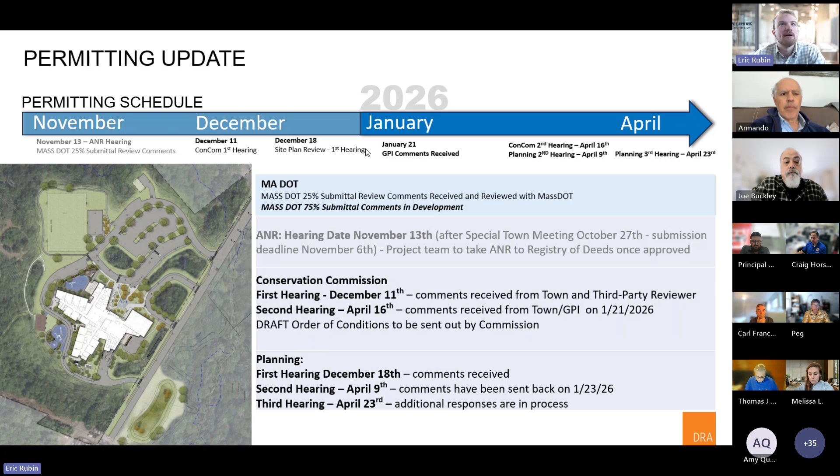Our overall project schedule: right now we are nearing the end of design development. Our 60% construction document package was completed and submitted to the MSBA at the beginning of February. Our 90% package will be complete in April, and our complete bid document package will be finished in June, and that'll go out to the qualified subcontractors.

We are actually in the process of pre-qualifying the subcontractors right now. Our request for qualifications went out earlier this week, and we expect to receive qualification packages from the interested subs in a few weeks, around April 15th.

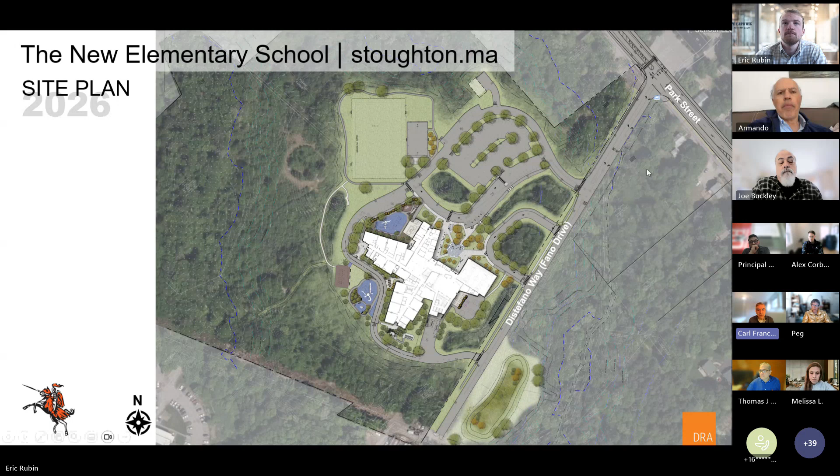We can go to the next one, Eric, that shows the site in a little more detail. So we have the opportunity here on this parcel of land that the town has owned for quite a while to develop an appropriate site plan that's both environmentally friendly and energy efficient, and much more efficiently laid out than the current South School, where there's very limited vehicular access both for buses and cars.

Here we have the opportunity to have a dedicated parent car loop for picking up and dropping off students, a separated bus loop for the 4 or 5 buses that'll serve this new school, and even a dedicated service drive and kindergarten drop-off around behind the school. So all of that is very consistent with the design we've shown to date.

And the building, as you can see in this site plan, is laid out in the pinwheel fashion with dedicated wings to the building. Two of the wings are classroom wings, one of the wings is the so-called community wing, and the fourth is the administrative wing there.

Again, the theme here is this is a school in the woods, and so we are trying to preserve a significant number of existing trees on the site as well, to give the building a nice context and a great backdrop for the students and faculty as they utilize the woods as part of the curriculum.

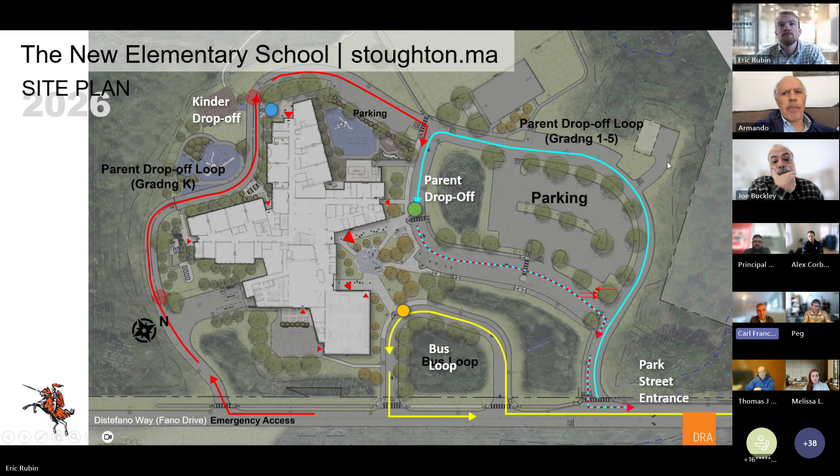Next, Eric, if we zoom in a little more on the building itself. Here's the main entrance, and again, whether you arrive by car, on foot, by bicycle, or get dropped off from a bus, everyone will be entering this entrance courtyard here, where the main entrance to the school is immediately adjacent to the administration for good security and welcoming as well.

And there's a dedicated community entrance too, to the left there, that if there's an event after hours in the cafeteria or the gymnasium, or on weekends, the rest of the school can be closed off and that entrance can be used. So that was another goal of the project that we've been developing here as we move forward.

And you can see the building is a 3-story building in part, but on the front side here it's just 1 story tall, to try to be a little more friendly to elementary students in scale and so forth. But by being 3 stories in the classroom wings, it's a more compact footprint, so we impact less of the site that way and save more trees.

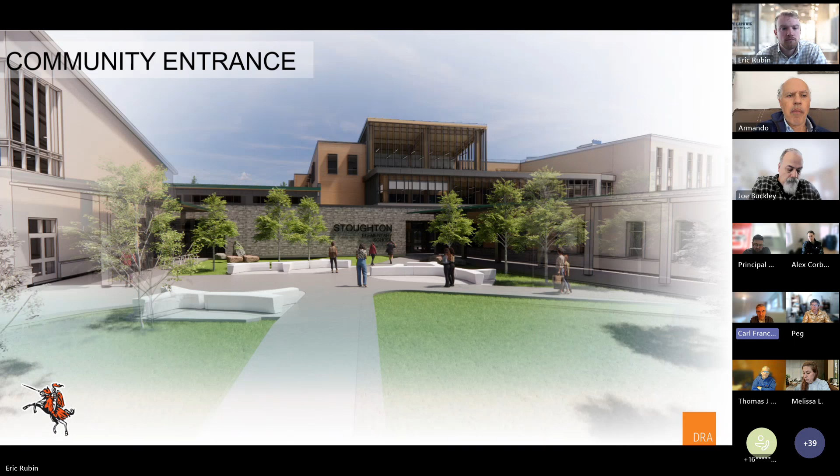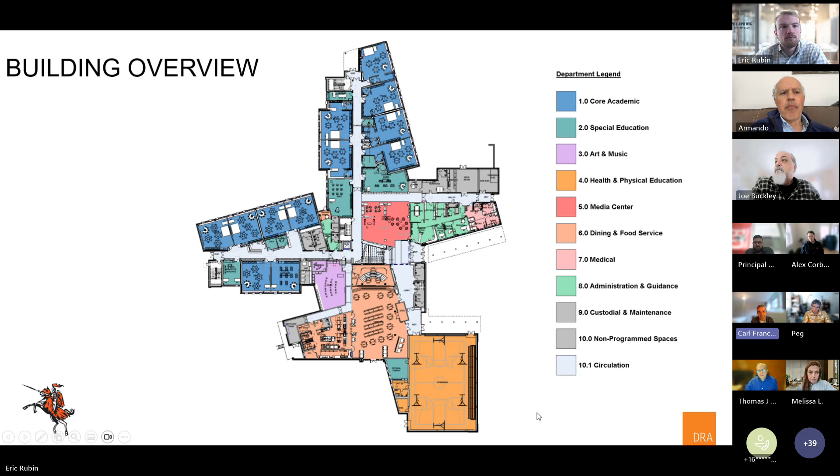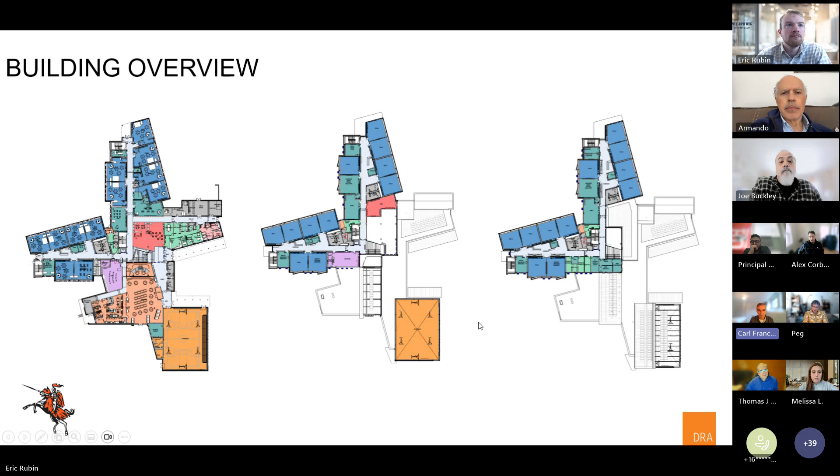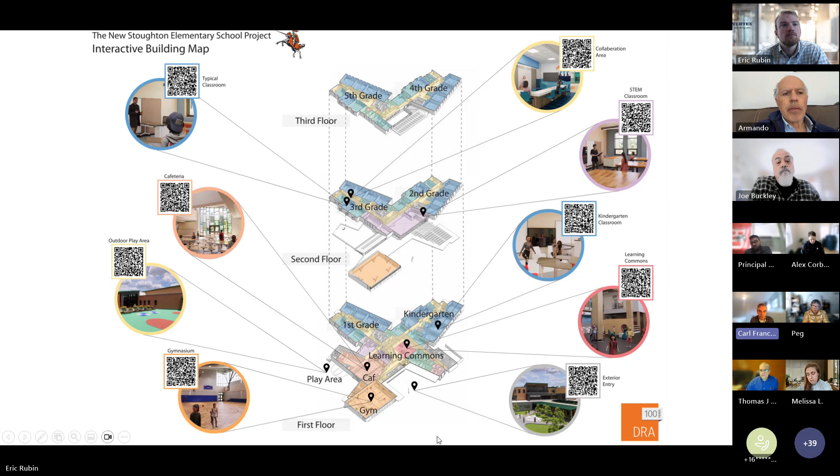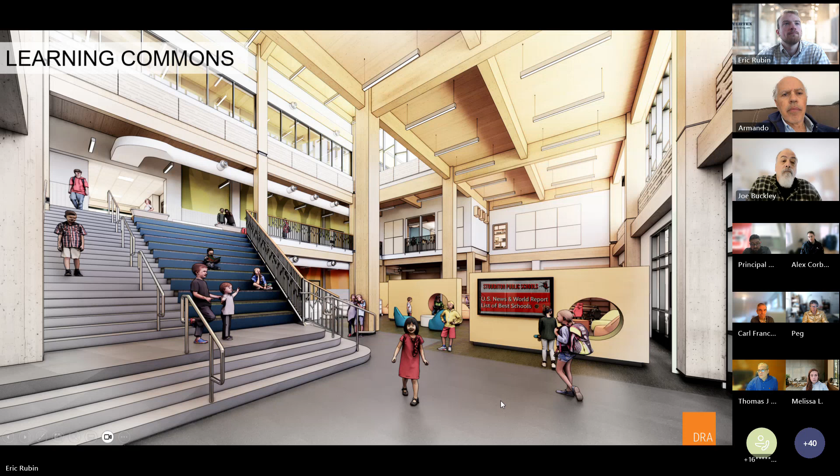If we look at one of these classroom neighborhoods, this is that angled space. In this case, at the lower grades, there are cubbies for kids to store their backpacks and coats. But there's also breakout areas, areas for graphics to identify each of these neighborhoods a little bit different from one another. All of the classrooms open off of these kinds of spaces.

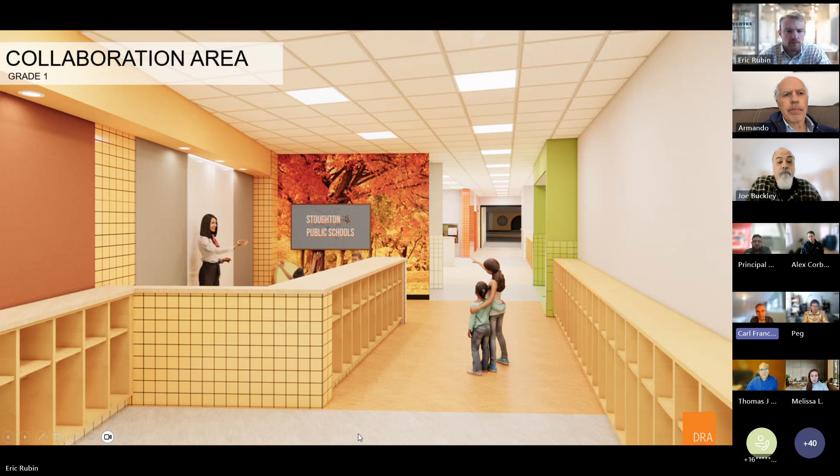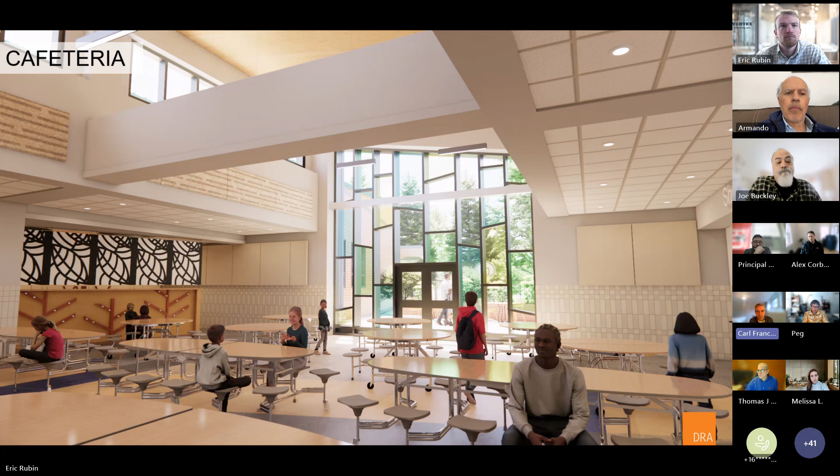In the cafeteria, which is also the auditorium space, you can see there's large glass areas, bringing a lot of natural light into the building, and it has direct access to recess and playground areas right outside the cafeteria. The tables are flexible and can be stored, and the space can be converted into the auditorium space for the school. If we go to the other view of this, you'll see, looking the other direction, there's a small platform.

Stage and curtains and a projection screen, so it can be used for community events as well as student productions and so forth in this one space, again with a lot of natural light being brought in.

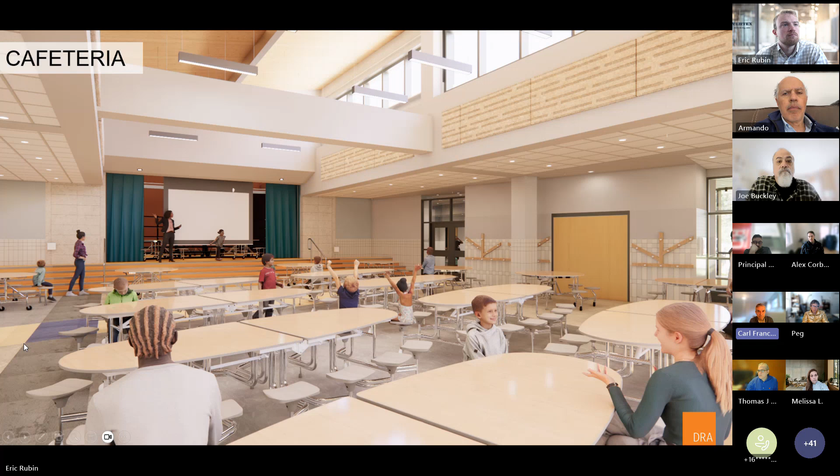Likewise, next is the gymnasium, which is not just an elementary school gym—it's actually sized with an adult-sized basketball court. It does have a curtain to divide it into multiple gym stations, but it's also flexible, that it could be used for a community, could be used for the high school JV basketball team to come here and play, and so forth.

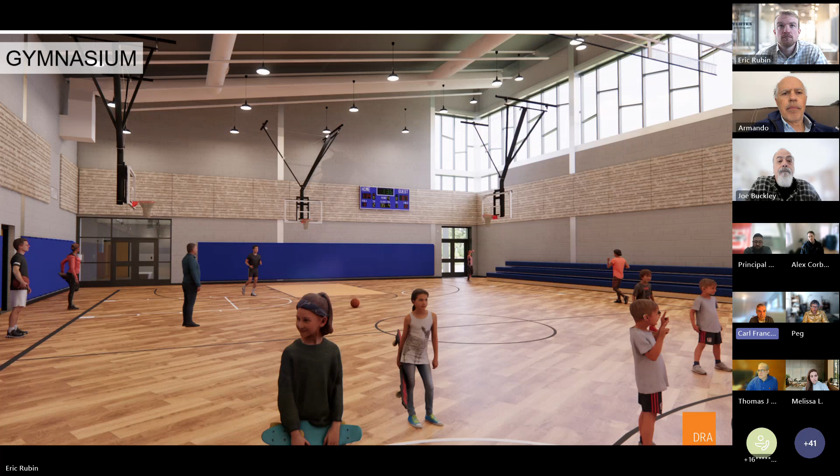And again, take advantage of the north-facing light here, so we get natural light into this space as well. So I think those are the renderings that we wanted to share with you.

Just to remind everyone, this is going to be a very energy efficient and environmentally friendly building with a lot of sustainability aspects to it. It will be registered with the U.S. Green Building Council, seeking at least a LEED silver registration. It might actually achieve gold certification. One particular aspect is that it's an all-electric building. There are no fossil fuels being burned here, but it also has geothermal ground source heat pumps being used for a portion of the building, both for heating and air conditioning, where wells are driven into the ground, and we take advantage of the natural difference in temperature there with heat exchangers in the building. So it's a very efficient, sustainable building, both in first cost and in energy cost going forward.

So I think those are what we wanted to talk about from a design point of view, and now we can turn it over to WT Rich team and Alex to talk about construction activities.

Thanks, Carl. Hopefully you guys can hear me okay. My name's Alex Corbett with WT Rich. I'm a senior project manager. I've been with them for 7 or 8 years now at this point. Echoing Carl's sentiments, really excited to get this project underway.

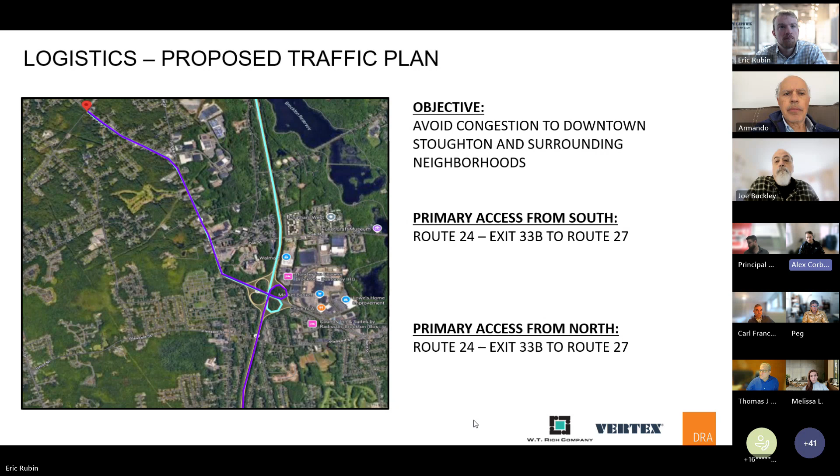Hopefully many of you have seen these logistics plans. I wanted to note they're from our proposal for this project in August of last year. Carl's renderings and images are a lot more updated than what we have shown here, but the concepts and the scheduling and the timing all remain the same. As Eric mentioned earlier, we're just in the midst of getting started on a site enabling package. The work is mostly tree protection, erosion controls, and clearing the site, really enabling the site to continue with building construction as we come out of this phase and more into the middle of summer of this year.

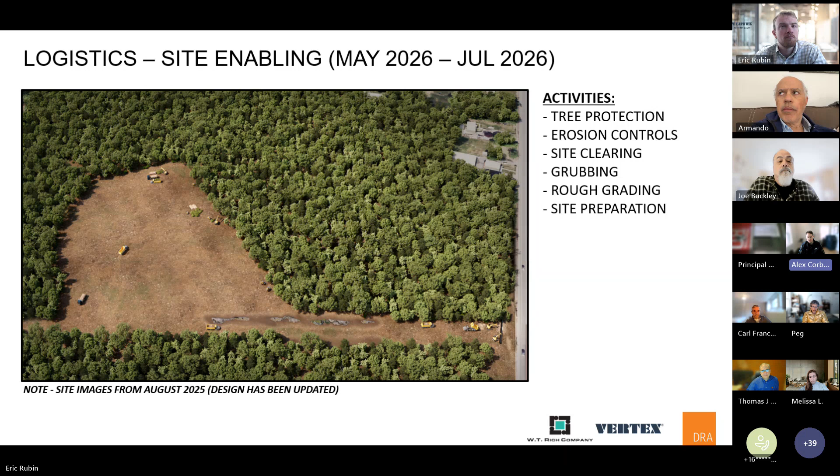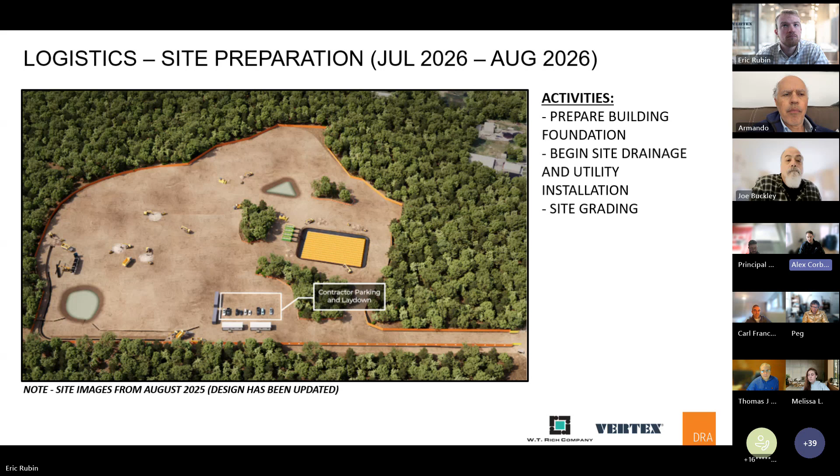As we get into July and the summer months of 2026, we've enabled the site, quote unquote. We're now getting ready to start our site utilities, site drainage, really getting the building pad, essentially the footprint of the new school, prepared for foundations, concrete and steel as we get into fall of 2026. This is the next layer in phasing that happens coming out of, call it May-ish of 2026 with the enabling into the summer months of site preparation as we get into the building construction process.

As you can see here, we're into August of this year. It's really going to come up quick, and I should note, we're talking 24 months in about 2 minutes here. So it's the fastest construction project you'll ever see today. But it is going to go fast. We're talking 4 or 5 months from now, we're getting into concrete foundations and ultimately steel in the building superstructure. Carl mentioned the geothermal wells - you can see at the top of the site here, north area of the site. That's where the geothermal wells will be under the future play field. That's another activity we're going to want to try to get in sooner rather than later, as it opens up quite a bit of space for us on site.

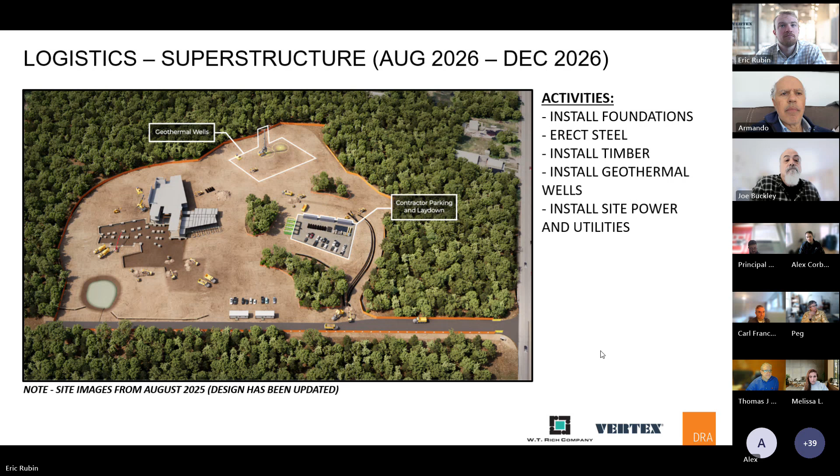Moving in towards the end of this year, we've got the majority of superstructure done with the steel and the mass timber. Those wood beams and columns in the heart of the school are installed, and we're getting into enclosing the building with sheathing, preparing for waterproofing, then the masonry, brick, fiber cement panels, and metal wall panels. At this point we'd also try to get some asphalt pavement down, probably a binder course, to clean up the site and make it usable heading into the colder, messier winter months.

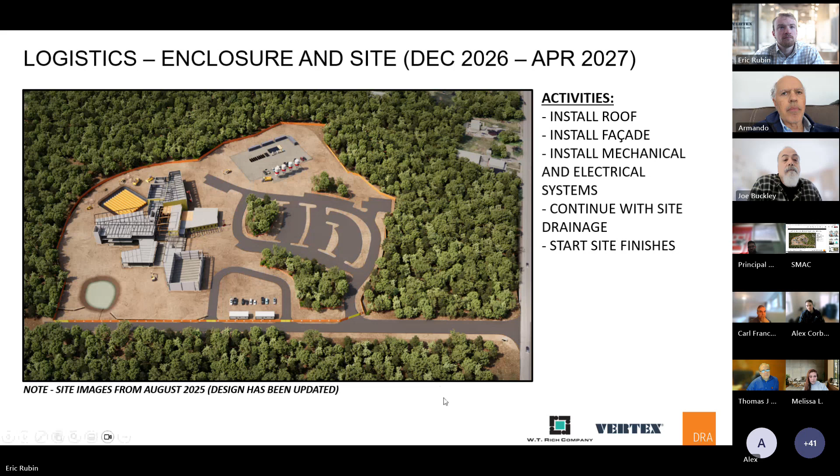Fast forward to the spring of 2027, you can see how the site and building have really developed. We're probably continuing with the brick and wall panel installation, and getting heavy into interior finishes. The mechanical, electrical, plumbing, and fire protection systems are being built within the school. We're preparing to activate the permanent building systems — rooftop units, heat pumps, switch gear — and fine-tuning a lot of the mechanical systems, pretty much all of next year.

Really hitting the ground running once the building is enclosed, getting the inside in good shape. Moving outside, we'll be able to start some of the concrete sidewalks and early landscaping, making sure we sync up with the required planting seasons, and getting into playgrounds and other site finishes throughout the site.

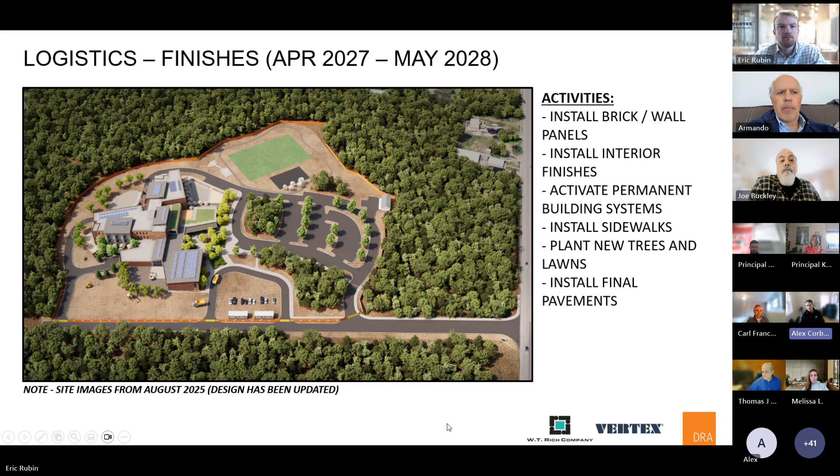And here we are, at the end of the construction process. We're currently targeting May of 2028. The idea is to get the building to a place that can be turned over to the school for furnishings and equipment, and get the school and community feeling comfortable well ahead of the start of the fall 2028 school year. We feel really comfortable with this schedule, and it's at a good spot where the school and community can be prepared to take over their building well ahead of occupying it and getting students in come that following fall.

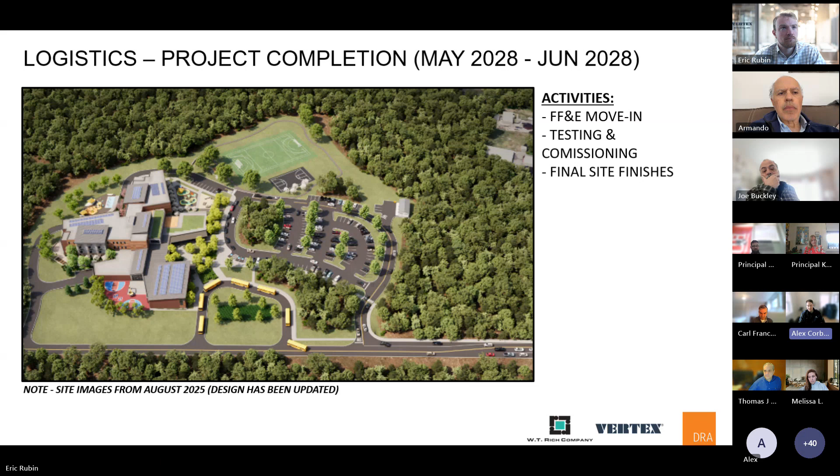All right, thank you, Alex. Thanks, Alex.

Juliet Miller, Superintendent-elect, excited to spend time with you this afternoon. The district is engaging in a redistricting process aligned with the construction of the new elementary school, since that will result in the closure of two elementary schools. This is a necessary step to ensure we're using our facilities efficiently while supporting our students equitably.

We are currently securing a third-party partner to conduct a comprehensive analysis of the district. This work will include enrollment projections, geographic heat mapping, and development of multiple scenarios for consideration. Community voice is critical, and we're committed to providing multiple opportunities for families, staff, and community members to offer feedback before any final decisions are made. There's also a dedicated redistricting page on the district's website, which will be updated regularly as we move through each phase of the process.

As we move forward, several key factors will guide our decision-making: alignment with the district master plan, support for our elementary educational plan, accommodating increasing enrollment and evolving student needs, expansion of programming including elementary STEM opportunities, consideration of maintenance and operating costs, travel distances between schools, efficient use of shared resources, and reducing duplication of resources across buildings. Our goal is to reach a final decision approximately one year prior to the opening of the new school.